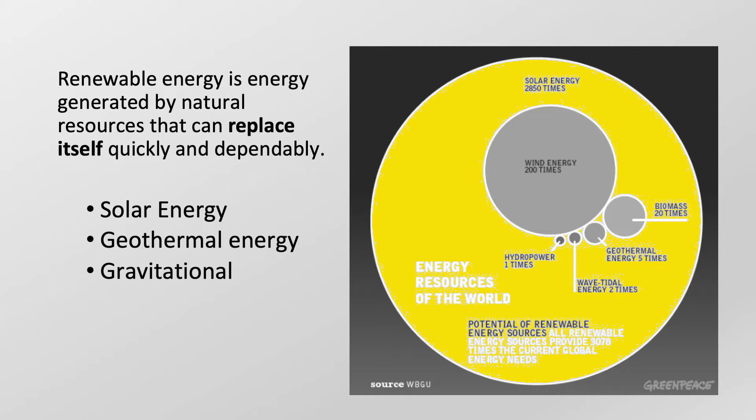The main types that we've got is direct solar energy, indirect solar energy, and then we have the non-solar.

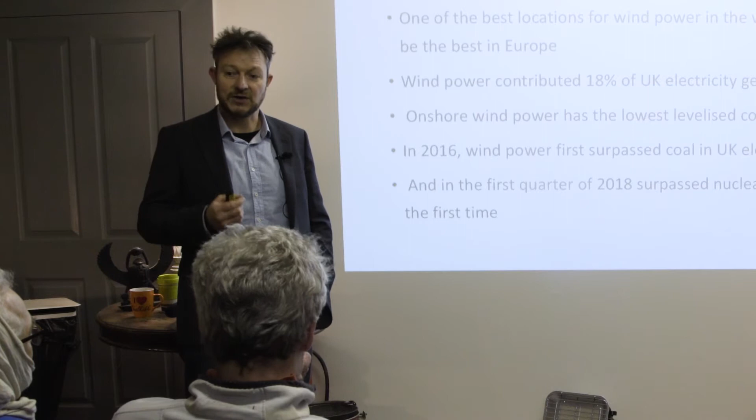Some nice facts about the UK: it's one of the best countries in the world, and probably the best country in Europe for wind resources. A quarter of all the wind in Europe is in the United Kingdom, British Isles and the North Sea. All we have to do is harness it.

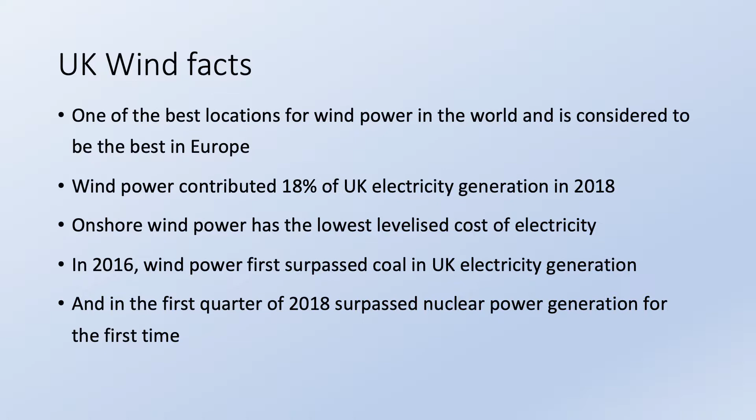Wind power contributed 18% of electricity generated in 2018. The cheapest form of energy in the United Kingdom now is onshore wind, and offshore wind is catching up pretty quick.

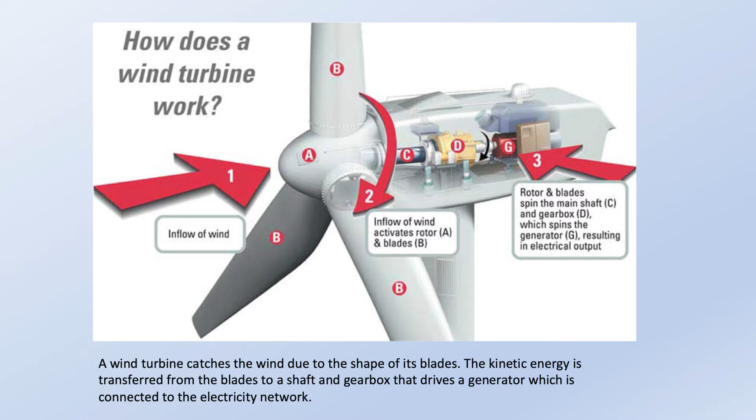So we've got now a standard wind turbine. You have a vertical post coming up, you have a generator on top. Standard design now is using 3 blades, and the blades are going around between 10 to 20 times a minute.

Here in the UK is the world leader in offshore wind. The largest wind farm in the world is the London Array. There's another one that's just gone up in the north of England, which is slightly bigger, and there's plans for even more.

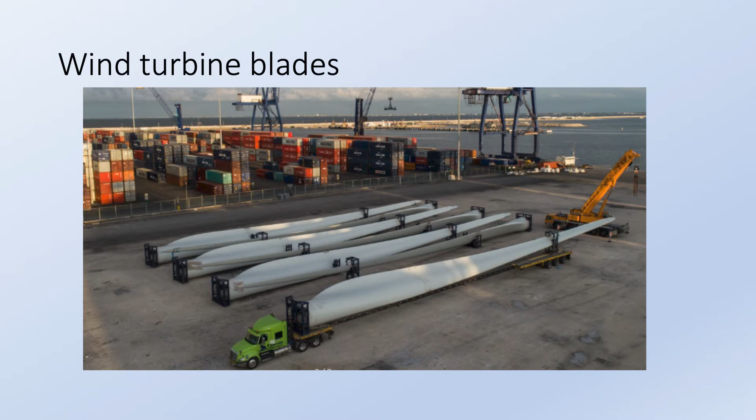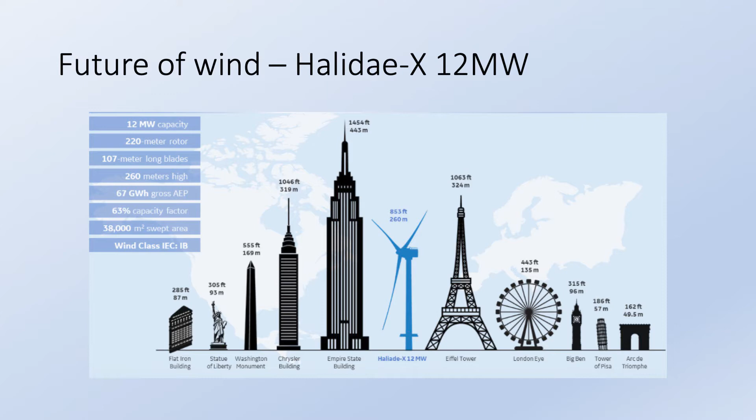The bigger the wind turbine you have, the more energy it catches. If you double the size of a wind turbine, you quadruple the output, and it's more efficient as well - economies of scale. To give you an idea of offshore wind turbines and the size turbines are going, this one is being built in Holland, and you can see it's not shy of the height of the Eiffel Tower. Its capacity factor is a lot greater because it can actually work in lower wind speeds.

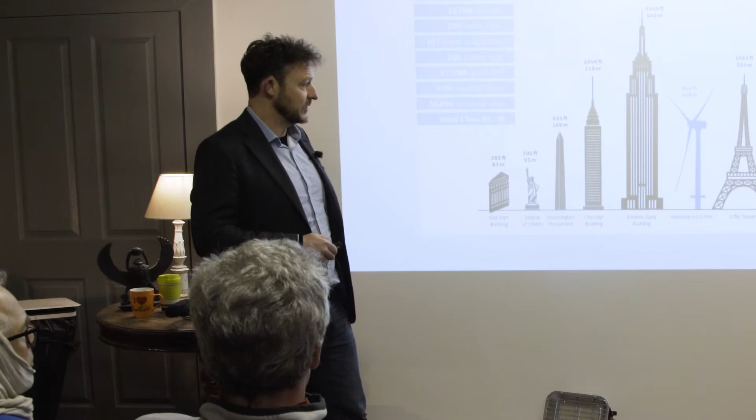One turbine is enough energy for 16,000 houses.

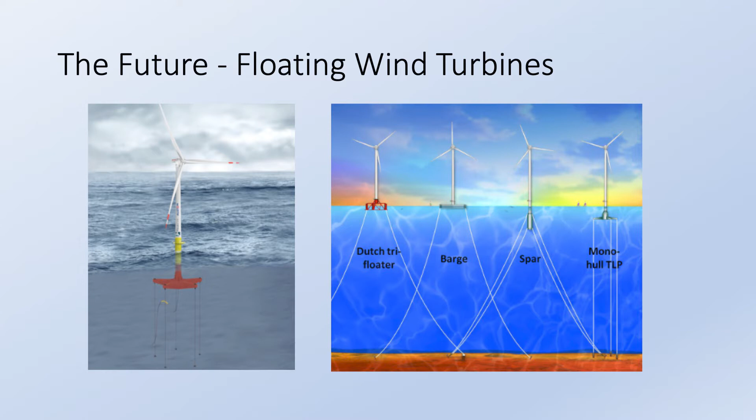More things coming into the future: we're going to have floating wind turbines. The first floating wind turbine farm opened in Scotland last year. The beauty about floating wind is as you get deeper into the ocean, you need to have more steel, more concrete, more cables, and more costs for actually constructing them.

And then if there's a problem, you have to send a big ship out to try and fix it, which costs a lot of money. If you've got a floating wind turbine, what you do is you unhook it from the seabed, get a ship, bring it back to shore, repair it, and bring it back out again.

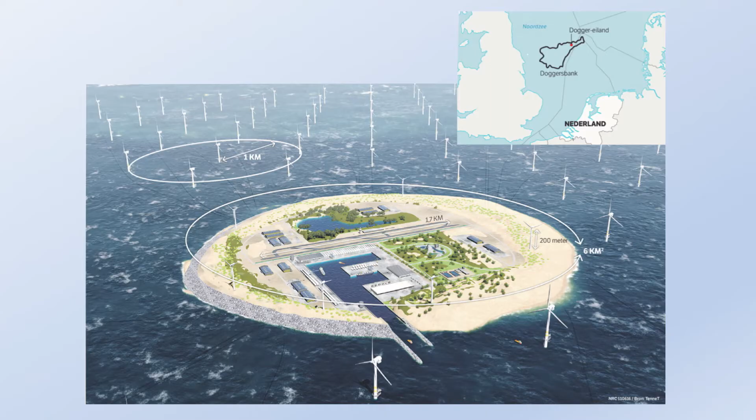In the North Sea, we've got absolutely grand plans for actually building an artificial island, and you're going to have interconnectors between Holland, Norway, UK, France, Belgium, and the whole idea is to bring the cost down even more.

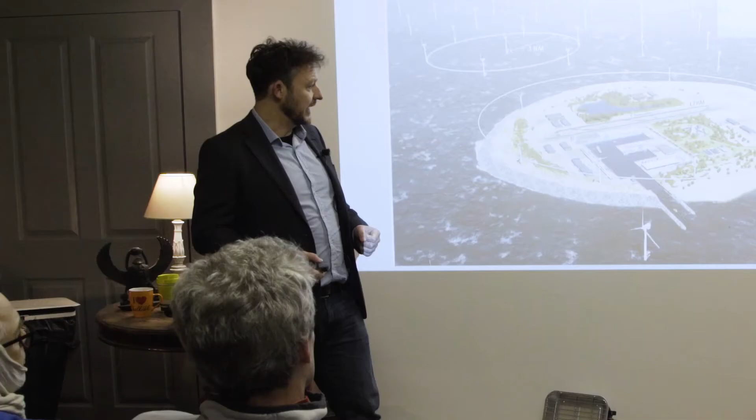Advantages: wind is never going to run out. It's cheap, it provides a lot of jobs, continuous jobs. It stops the reliance on imported energy into the country, and it's actually a very efficient use of space.

If you use wind turbines on land, you can actually still have sheep and you can still have farms underneath. It doesn't actually interfere, and you can even have a forest underneath.

Biggest disadvantage to wind is wind doesn't blow 24 hours a day, so it's an intermittent supply. Apart from that, there's a high investment cost for wind turbines.

Visual onshore wind - you have people complaining they don't like how they look, and that's why they got rid of onshore wind in this country. Pretty much was the main reason.

Again, cheapest form of energy. Noise - they've got better at stopping this. Sometimes if you have quite a few of them together, you get this certain frequency of noise.

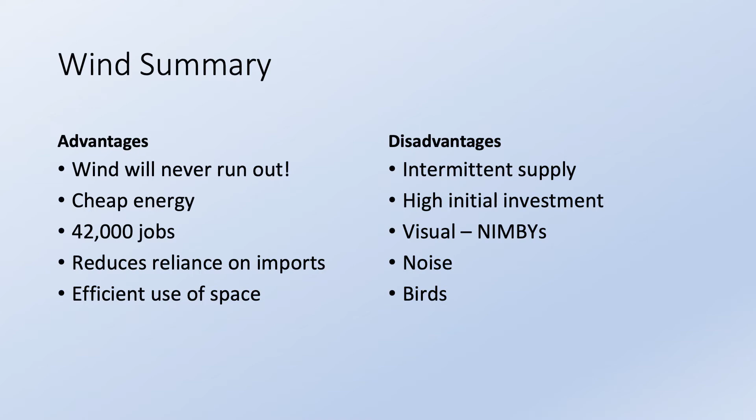And there is a problem with birds, but surprisingly, the amount of birds that are killed compared to birds killed by cars, it's outnumbered. I think it's something like 50 to 1 or whatever.

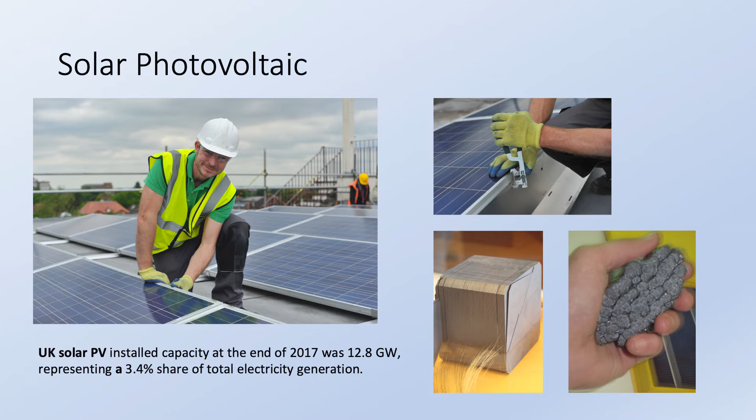Silicon is the main ingredient for solar at the moment, which is sand. It's very versatile, it's transportable, it works in the North Pole, it will work in mountains, it will work on ships, anywhere that's got solar radiance.

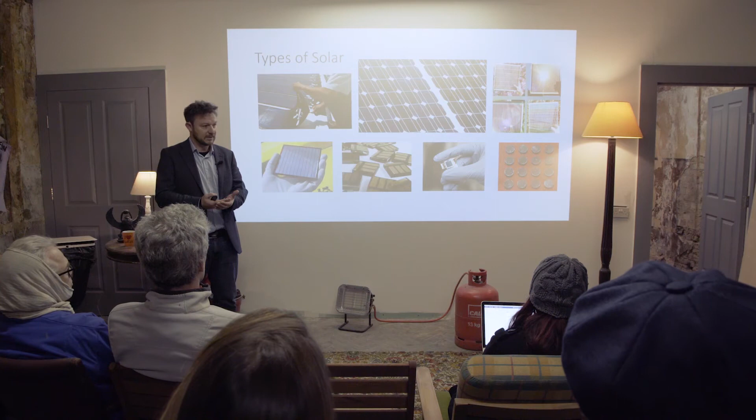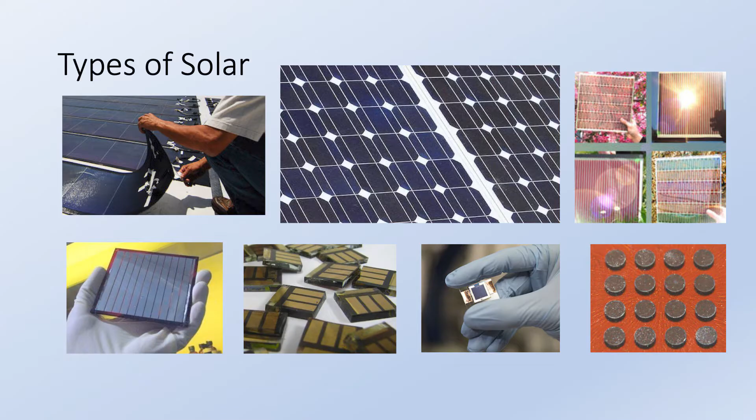Solar technology is exploding. We've got organic solar panels now, and ones that use thin film and monocrystal together, so they form a plate and increase efficiency. These ones here are mono and polycrystalline, so 97% of all the solar panels you see in the world are going to be one of these two types. From here, you can get ones you can even manufacture into clothes, ones that are clear, glass that can be a giant solar panel, and metallic paneling so the whole building can be solar.

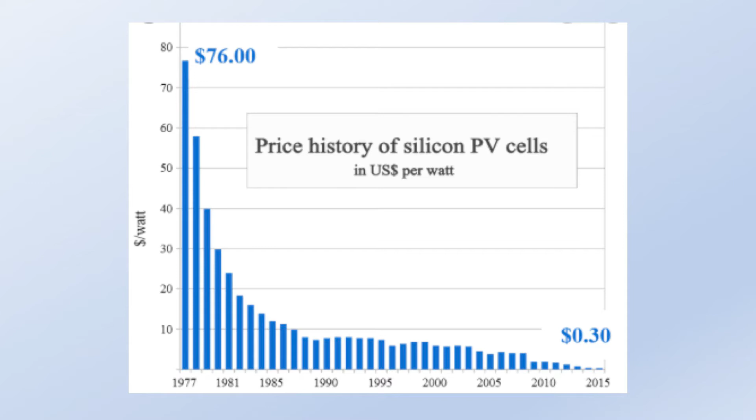The price is just tumbling down. They've had the first unsubsidized solar park go in the UK. The price of electricity being produced by solar is cheaper than fossil fuels. All we have to do is figure out clever ways of storing it, battery storage systems.

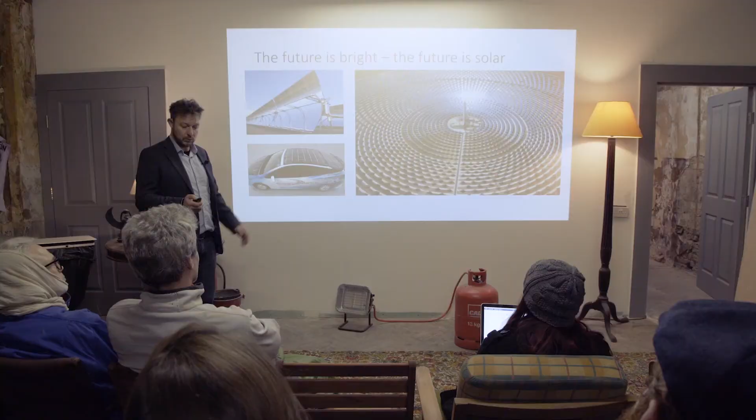We've got now concentrated CSP, and what it does is super concentrate all the sun into one area, into here. You can also store the heat from this into molten salts, and run them 24 hours. Parabolic units have a glycol solution going in, it gets superheated, and this then goes and drives the turbine. They use quite a lot of these in the States.

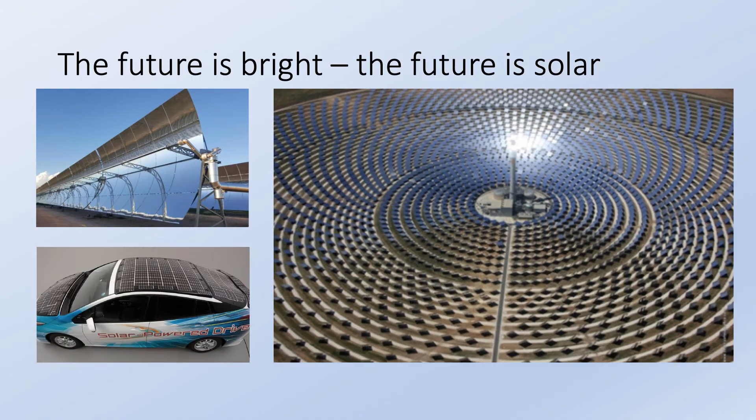You can actually have an electrically powered car. If you only drive it about half an hour a day, you can get all your energy without even having to plug it in.

By 2050, I think about 10% of all the e-waste in the world is going to be solar panels. We need to be putting in plants to actually recycle them.

Heat pumps are going to be one of the most important technologies in the UK. All the different publications for how we decarbonise the grid and how we decarbonise the heating systems of the country, so many of them all come back to heat pumps. They run on electricity, and you can fit them anywhere as long as you've got space. They've been using them for a very long time in Germany and Sweden.

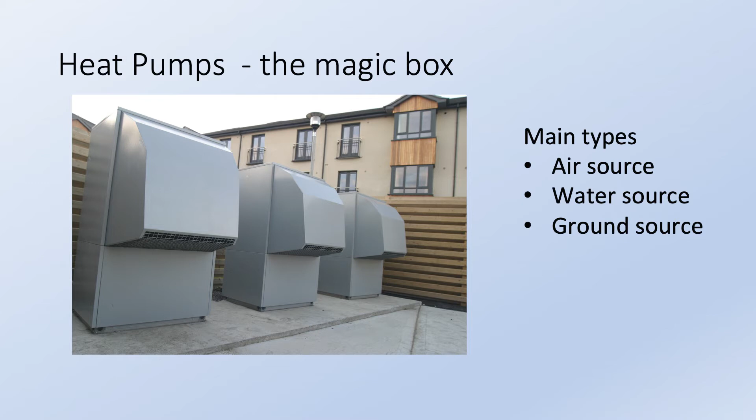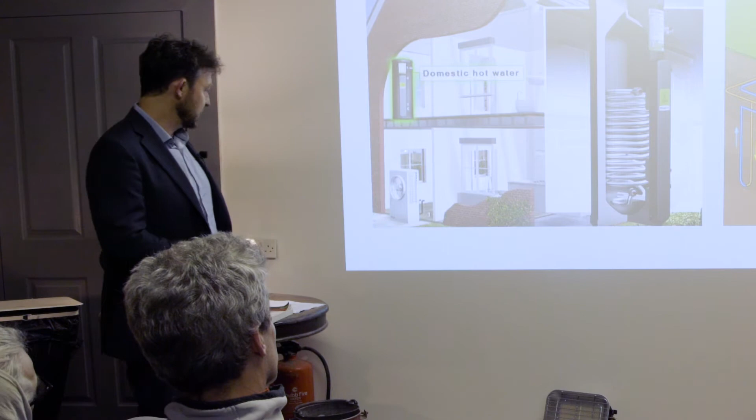There are 3 main types: air source, water source, and ground source. How it works is a ground source heat pump extracts a little bit of heat from the ground, and this here is an air source heat pump, it gets the energy from the air. So what a heat pump is doing is moving low-grade heat, compressing it, and then moving that compressed heat. A heat pump is actually a heat transfer machine.

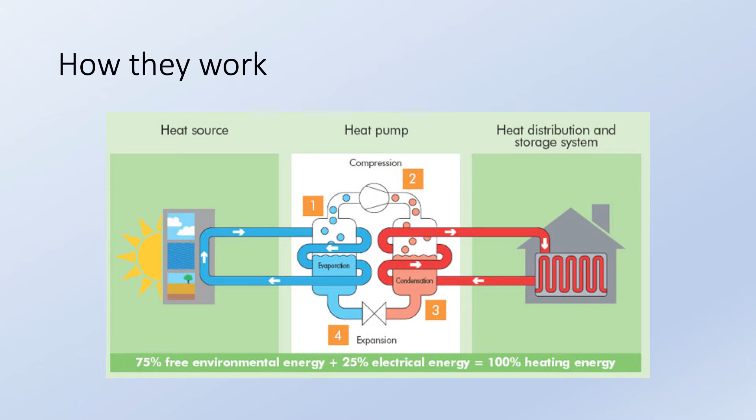The hard thing about heat pumps is getting the sizing right. If the size is too big, your heat pump is not going to be running very efficiently. If you've got it too small, it's not going to have enough heat to actually heat a building. To heat a building, it needs to have a certain amount of air tightness, so the first thing you need to do is increase the thermal insulation and increase the air tightness. The problem with heat pumps is they're expensive.

The actual units themselves cost a lot of money. To retrofit, you need to put in additional piping, a buffer tank, and a new type of cylinder. So this all costs money compared to a gas boiler. The running cost, once you get a heat pump up and running, is quite low, because every kilowatt of electrical energy you put into it, you get 3 to 4 kilowatts of heat energy out. So this is the magic part of a heat pump.

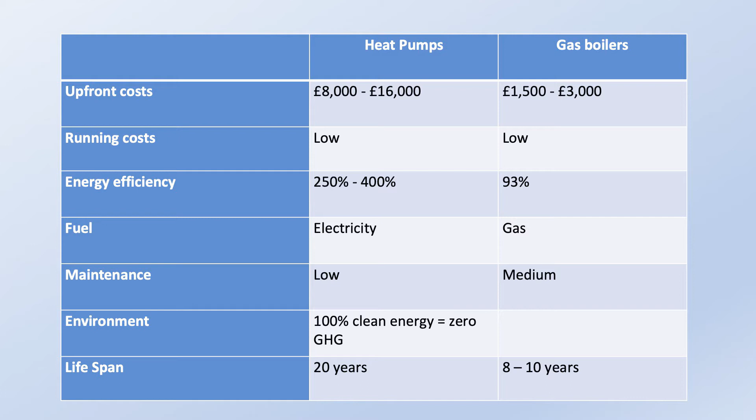The fuel is electricity versus gas. Maintenance, it's like a fridge, how often do you need to fix your fridge? Not very often. If you get clean energy going into them, they're actually 100% carbon neutral. That's why we're relying on meeting our future zero carbon Britain by using heat pumps. Some of the problems we've got are capital costs.

Most buildings in the UK won't be suitable for heat pumps because they're not warm enough. They need to have their energy efficiency improved first. The design is a big problem - you can't just rip out a gas boiler and stick in a heat pump.

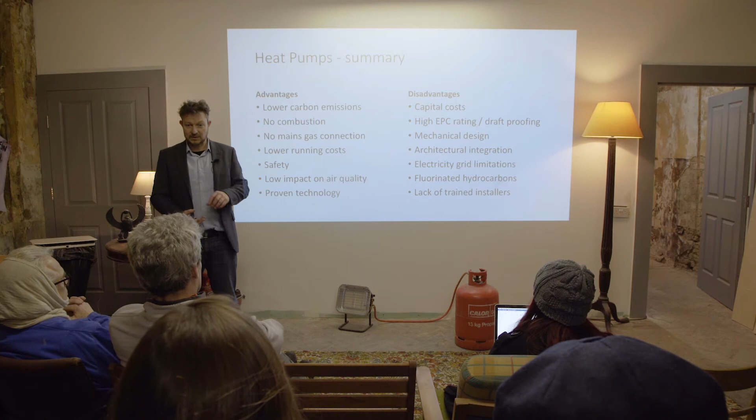There's limitations on the grid as well. If you put in a big commercial heat pump, it needs a certain amount of energy to actually get it started. Most heat pumps have a little amount of F-gas, which is 23,000 times more potent than CO2. If anything happens to it and it gets into the atmosphere, you've ruined everything - the whole advantage of having a heat pump.

Luckily, we've got very strict F-gas regulations in place in this country to deal with that, and people have to be highly trained to use F-gas, and they're hermetically sealed, so not too much of a problem. The other biggest problem we have is lack of trained installers. But once it's up and running, no maintenance costs, they last a very long time, proven technology, they're very safe, and there's no combustion going on inside them.

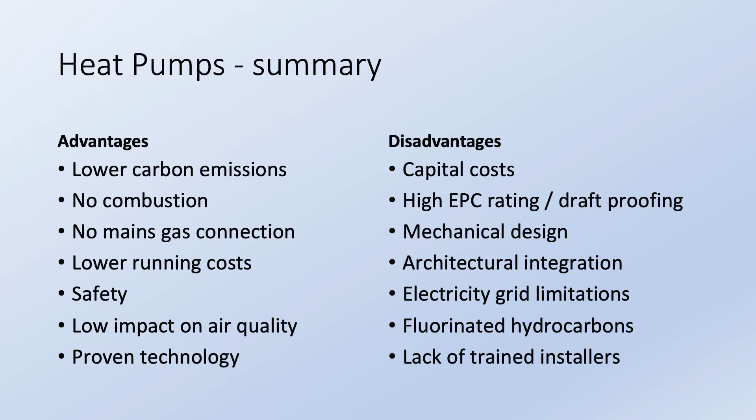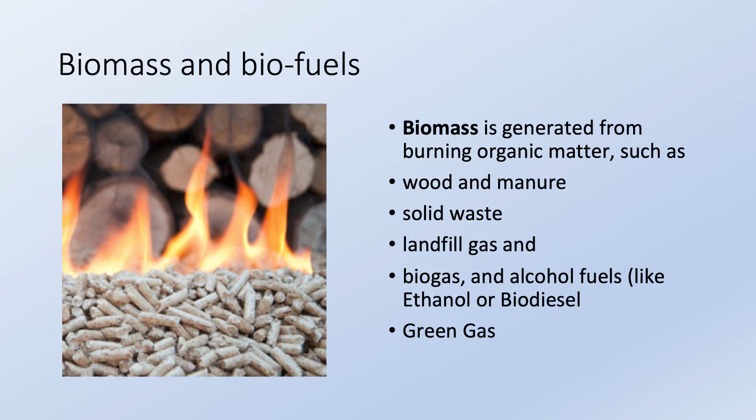Biofuels, biomass, biogas - we use a lot of these in this country. Solid waste, we burn rubbish, but it's not a very good source of energy. We've also produced fuels from biogases as well. In the future, quite a lot of the UK energy mix is looking at using biogases and biofuels, so it's a technology we need to keep an eye out for.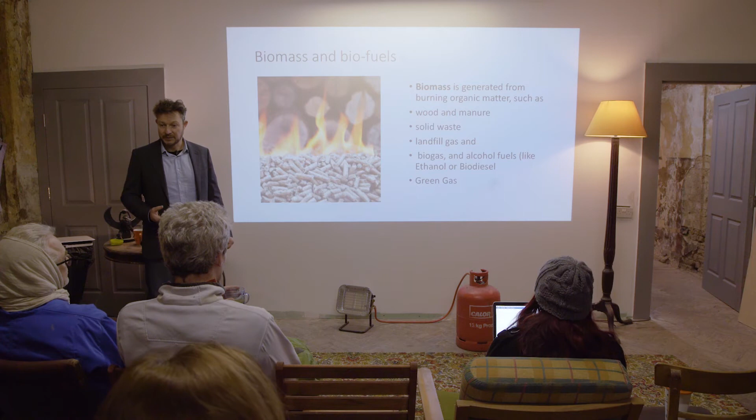One of the things about biomass is anything produces waste, it produces methane, or it produces carbon dioxide. It's claimed to be carbon neutral. In the olden days, the whole world was carbon neutral - people would chop down a tree, light a fire, cook. A couple of years later, 20 or 30 years later, a tree grows back and they cut it down again.

Now we've got a huge population in the world. We haven't got enough trees, we haven't got enough biomass. It's not the answer. In this country, we had power stations like Drax converted to biomass, and they were actually importing wood from America. A lot of the wood they were importing turned out not to be as sustainable as they were claiming. Once you start working out the true carbon cost, it wasn't actually as green as people claimed. If it's used correctly with certain types of rotational crops, it can work brilliantly. If you do it wrong, it's adding to the problem of the environment.

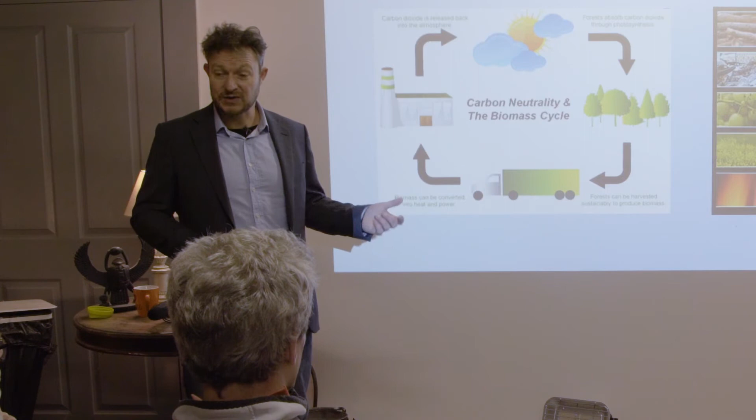Quite simply, you've got different wood fuels. You've got rubbish, which we use a lot in this country - we're actually building more incinerators, which I'm totally opposed to. You've got alcoholic fuels, you've got crops - they talk about changing land use and using fast rotational crops, which seem to work quite well.

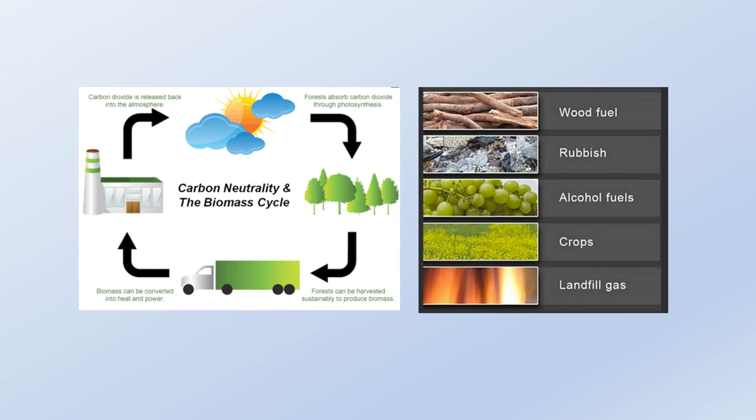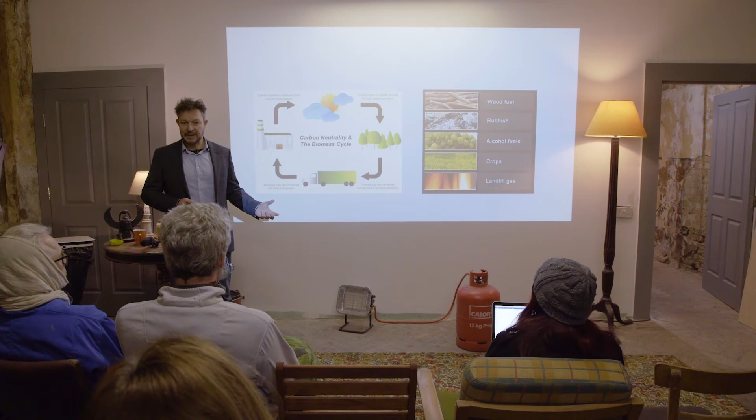Also, you've got biogas produced by landfill and methane, where they stick pipes down and extract the methane and burn it. Used correctly, in a lot of countries it's great because it gives off a vast amount of heat. You inject some air to the back of it, and it super burns the emissions, and then you can put scrubbers on the waste air coming out, which cleans it up as well. So done right, it's quite good. Not done correctly, it's absolutely awful.

Solar thermal is probably the simplest renewable technology. It doesn't actually have to be direct sunlight, it can be warm air as well. You've got these collectors - these are evacuated tubes, a sealed unit, glass on the outside. Inside you've got black strips with some foil, and then a glycol solution that goes in and out of the plates.

Some of them just have a heat transfer system where the glycol solution touches the plates and transfers the heat. It superheats to 180 to 220 degrees Celsius. You go to Greece, you go to Spain, and they've got nice simple ones where the collector and the tank sit right beside each other - nice and simple, throughout the day it heats your hot water, and then you get to use it.

More modern ones, you can actually use these to preheat hot water for a heating system, so it works quite well. You can actually combine them with heat pumps - you preheat your hot water with solar thermal, and then your heat pump kicks in and uses the preheated water as an energy source.

In Denmark, they've gone one step further, and instead of putting one or two of these on top of a building, they put hundreds into fields, with giant water tanks built on their buildings, and then use that to heat buildings during the winter. But you only need one or two solar thermal collectors for 4 to 6 people in a house, so you don't actually need that much roof space.

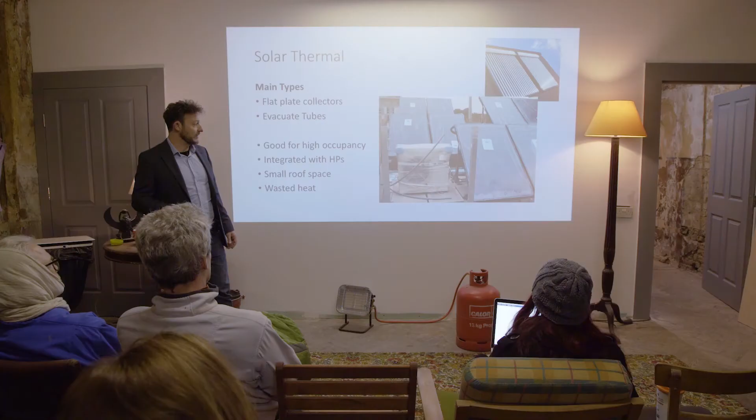Very little can go wrong with it. Leaks are a bit of a problem - if it leaks, the glycol solution leaves a bit of a pink stain in places. But apart from that, once it's up and running, yeah, brilliant.

Hydropower produces a vast amount of energy, but also has a vast amount of problems. You've got 3 different types: impounded, run of the river, and pumped storage.

You also get micro hydro, which actually works quite well on small little rivers. Big problem with hydro is if you've got a drought, they're not going to work very well.

Huge environmental damage in hot regions because dammed water causes debris and silt building up. It forms methane, and a vast amount of methane is actually released from hydro plants, so much so that the IPCC is going to change how it does accounting for hydro. That's why hydro is counted differently to other renewable technologies, and there's also huge damage to fish stock and populations.

Building it as well, the likes of some of the latest dams in Brazil involves literally destroying vast areas of pristine rainforest and using a vast amount of concrete. Amazing technology though - it produces more renewable energy at the moment than any other technology in the world, but it's coming of age in terms of how we actually use it.

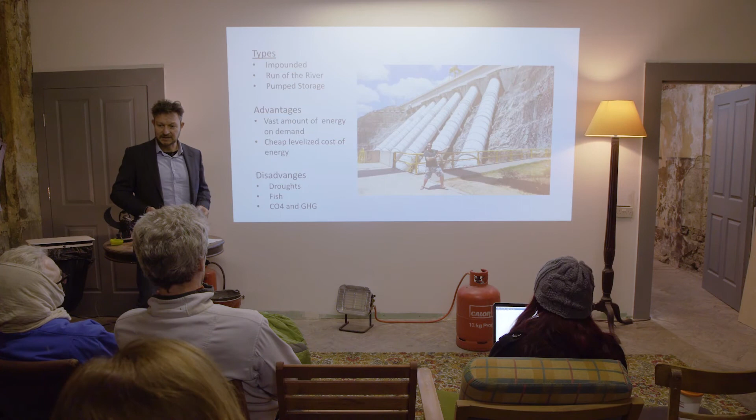The preferred technology is run of the river, where you don't dam a whole river - you siphon off part of it and redirect that to generate electricity without upsetting the rest of the river flow.

Tidal energy, absolutely amazing. Seawater is 832 times denser than air, so it's got over 800 times more energy in it. You've got three different types: tidal streams, which is very similar to hydro using the same types of turbines, tidal barrages, and tidal lagoons.

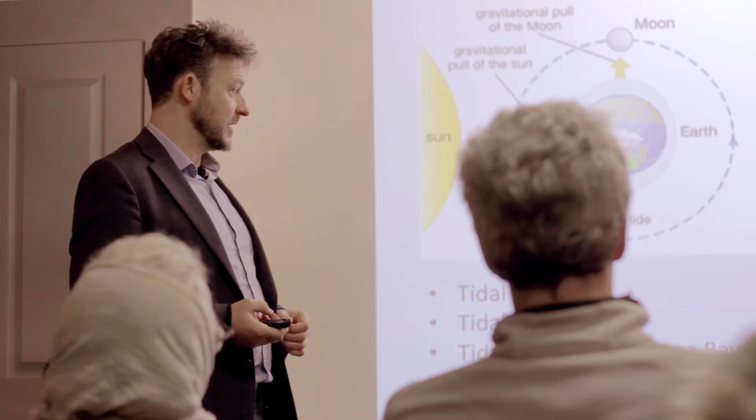A tidal lagoon - you might have heard of Swansea Bay. Every couple of years they talk about putting a tidal lagoon in Swansea Bay. It got voted down again, saying it's too expensive and too environmentally damaging. After doing a bit of reading about it, it's a little bit questionable really.

If you put one in Swansea Bay and Cardiff Bay, it would produce probably about 7-8% of the electrical needs for the next 120 years in the United Kingdom. Vast amount of energy, and it's predictable - two tides going in and out. The British Isles, including Ireland, has the second highest tidal range in the world, so it's a vast amount of energy. Within the first 6 months it's actually paid for all the embedded energy for the next 120 years, so in terms of energy payback you cannot get much better than tidal lagoons.

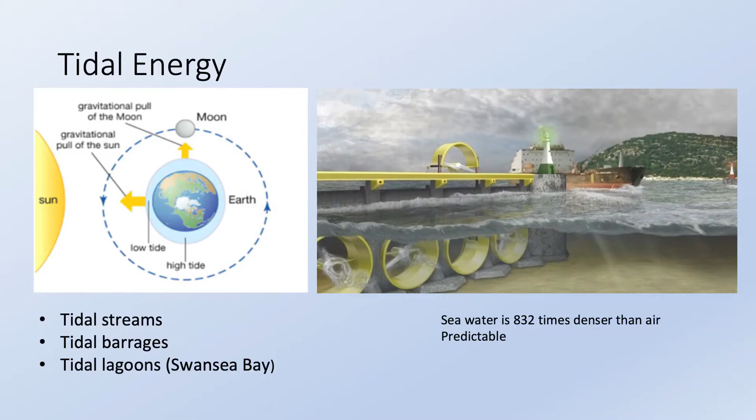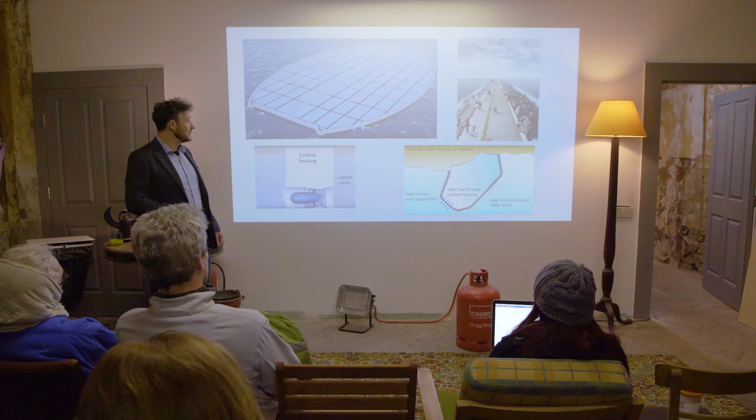So these are some of the different designs we've got going on here. You can actually go and create an artificial lagoon. Then what you do is put in turbines that control the flow of water going in and out twice a day, so four times a day producing energy. Moving to the future, you can even cover the whole lot with solar panels.

This is a typical tidal lagoon proposal - I think there's about 6 areas in the UK they're looking at putting these, but again it got shelved by the British government. The government said it was £150 per megawatt strike price, which is very high. But if you average it out over 60 or 120 years, the actual price comes down quite a lot, so it depends on which way the accounting was going.

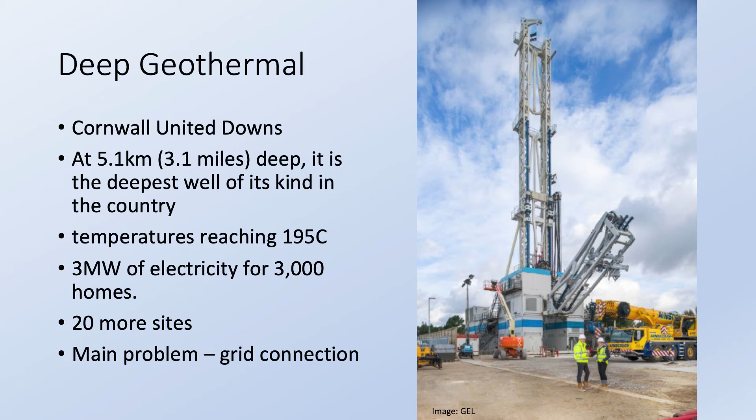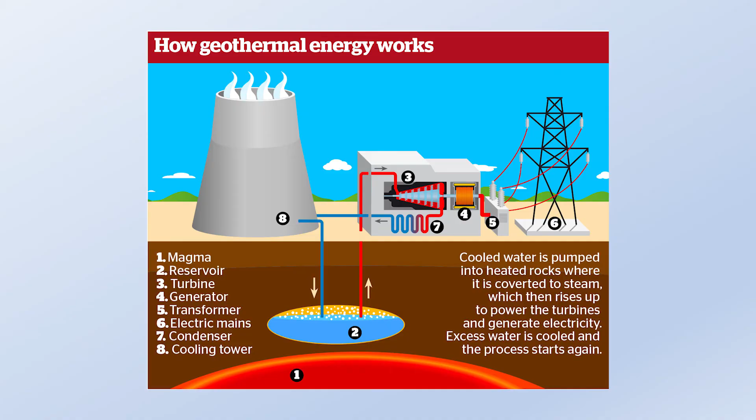In Cornwall, they're starting to use deep geothermal, where you get a giant drill and just keep drilling down 3 or 4 kilometres. Then you put pipes down, you put water down, and the water comes back up with its temperature raised, and you use that superheated water to power turbines. Very simple - the hard part is the drilling down and the engineering that goes into it. Once it's up and running, it's a fantastic amount of energy you can get from the ground, but there are only certain places you can use this type of technology.

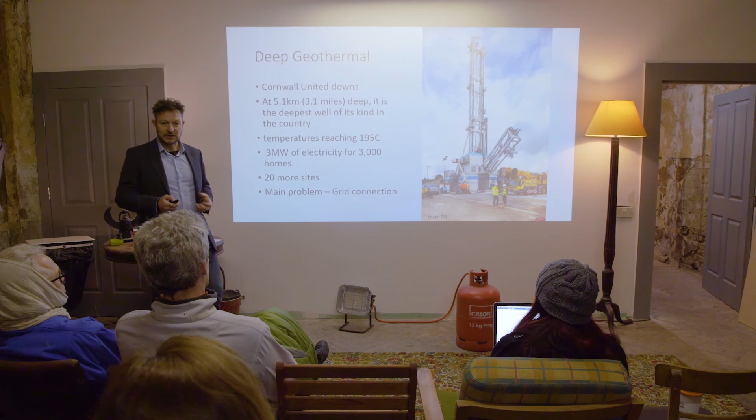It has to have a certain type of rock and certain characteristics to be able to use deep geothermal. It's actually used quite a lot in Iceland, New Zealand, Indonesia, Japan - anywhere with volcanic activity close to the surface. But again, there's only a certain amount of energy you can get out, because even that needs to replenish its heat.

The disadvantage is you can't switch them on and off. You've got problems with nuclear waste. You've got problems actually getting enough uranium. And you've got the build cost.

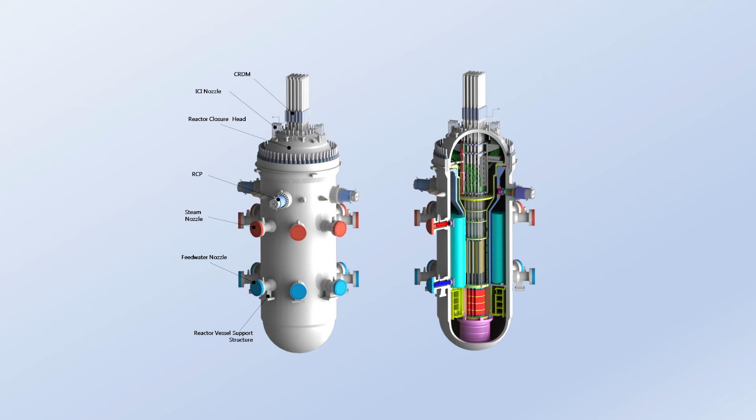The government here in the UK, all the future plans rely very heavily on nuclear. There's even plans in place to build small modular nuclear reactors, kind of like the reactors you get in nuclear submarines and nuclear ships, and you can have them in towns and cities around the country.

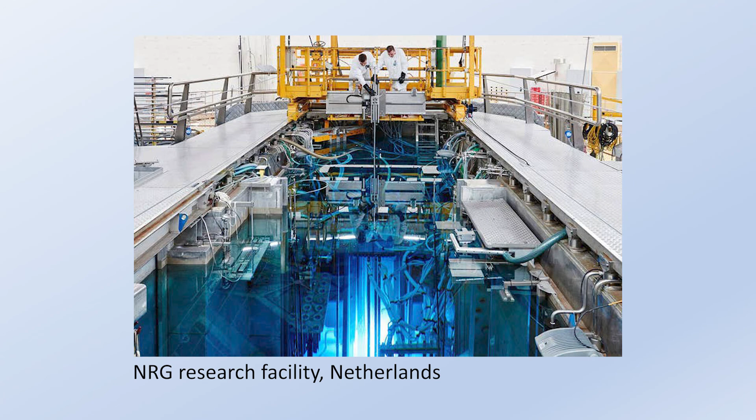This is uranium, third generation. The ones of the future, we could have thorium, which has a lot of added benefits, a lot safer, except we haven't cracked that technology yet. I think we're about 10, 15, maybe 20 years away from thorium reactors.

So there's a big question about nuclear. If you get rid of nuclear, what are you going to replace it with, is pretty much the question. And the future, smart grids.

All this intermittent energy that we're going to be producing, what we need to do is balance it with our energy needs. So on a very simplistic level, we've got things called microgrids.

So microgrids, you start putting them in Africa, where you have a school, a community, you have like 5-10 houses, and what you do is put in a solar PV system and a battery storage system and a small wind turbine, and all the energy you get, you use.

When you run out of energy, you have some in your battery. Then when you run out of that, you have a couple of hours with the lights off.

What we need to do moving to the future is have smart grids where different appliances, different industries as well, so heavy electrical using industries, when demand increases, start switching off different areas. It's all done by grid monitoring that goes on, nice and complicated, that actually manages everything.

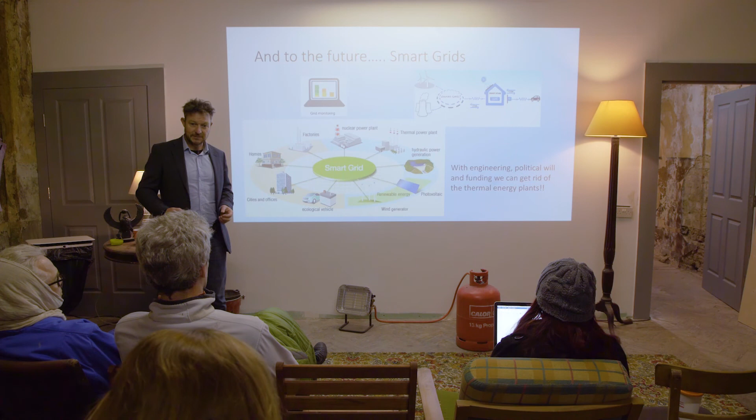And you tie it into interconnectors with different countries, and you go from a national grid to an international grid, and then you're starting to create kind of super grids. This is where we're moving in the future. If we can crack battery storage or storage of energy, this will work quite well.

I'm coming towards the end now of where we start tying everything together. This here is from our friends in the Business Energy Industrial Strategy. This is looking at the future costs of energy. What we've got here, we've got our main renewable sources in the UK, which is onshore wind, offshore wind, and large-scale solar. Then we've got our traditional fossil fuels, and then we've got nuclear.

It's the life cycle cost of a plant. So you work out everything from concept to building it, to putting energy in to run it, to decommissioning it, and starting again. And you end up with this, it's called levelized cost of energy, and it's a very good way of comparing different energy sources.

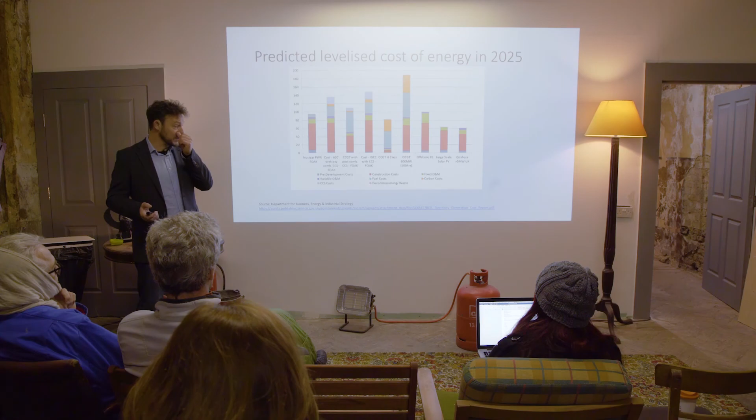What we've got here is nuclear. So this is the pressurised water reactor that's going on. I think it's FOAK, it hasn't been tried before, so it's new technology. There's no case study that they can work from.

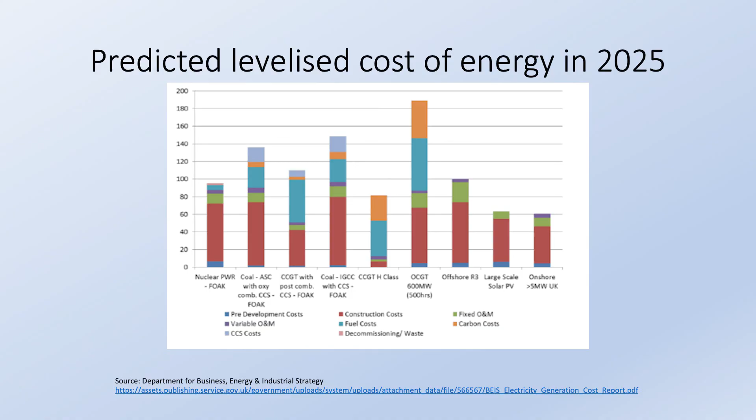So what you can see here, quite simply, your renewable sources are actually cheaper. And as solar gets cheaper, the levelized cost of solar is going to be reduced, with offshore wind as well. Once they get interconnectors in place, again, the price is tumbling down.

This is quite a big major game changer. Fossil fuels are now more expensive than renewable energy. And we've never had this before. We've always relied on subsidies.

Everything comes down to balancing the grid. With an intermittent energy supply, if you overproduce wind and overproduce solar, you need somewhere where that excess energy can go to, such as pump storage systems, smart grids, electric vehicles.

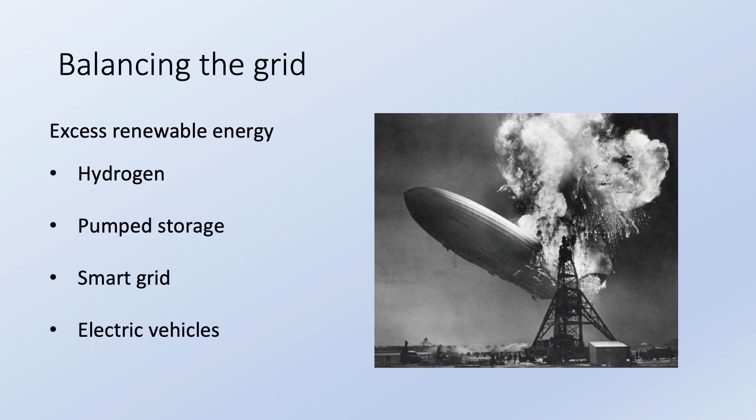But the future, I think, a lot of it's going to rely on hydrogen. You can use that excess amount of energy using electrolysis, split water, and you've got hydrogen that you can store. Once it's stored, you can actually use it sometime in the future to produce energy, and you can also use it at the same time for driving cars, heavy goods vehicles, vans, and trucks. So it's definitely a technology of the future.

So combining intermittent supply of renewable energy, pump storage and hydrogen and a smart grid, we can actually get 100% renewable energy to run the country. There you go.